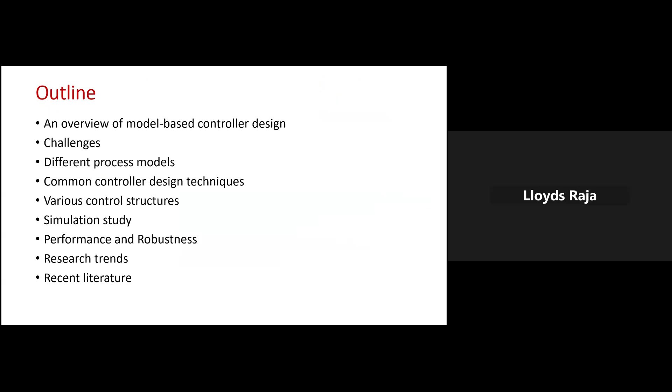The topic would be on model-based controller design, and we'll focus on some applications as well as the recent trends in this domain towards the end. I will keep the initial part of my lecture little lucid so that all of us can understand and correlate. In between, we'll also switch a little bit to the simulations, some very basic simulation exercises, so that you can connect with these topics in a better manner.

So first, we'll start with an overview. What this model-based controller design is all about. And we'll talk about some of the challenges in it. And we'll talk about various models.

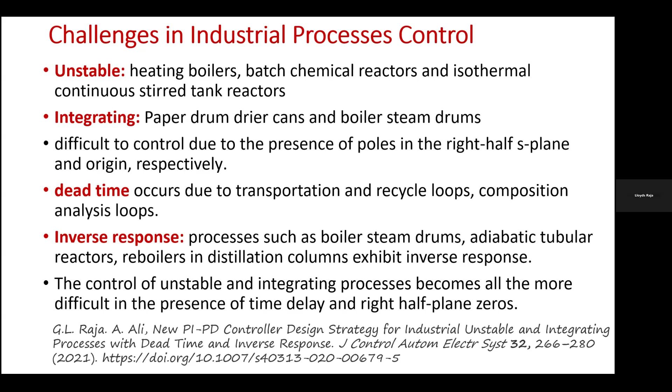Then there's inverse response. Some processes, when you analyze their behavior in open loop, respond in a completely opposite direction than expected, momentarily. You can see the response in the opposite direction for a while. This happens because the mathematical model of those systems has a right half plane zero. These types of processes are called non-minimum phase processes or inverse response processes, and they become even more challenging to control.

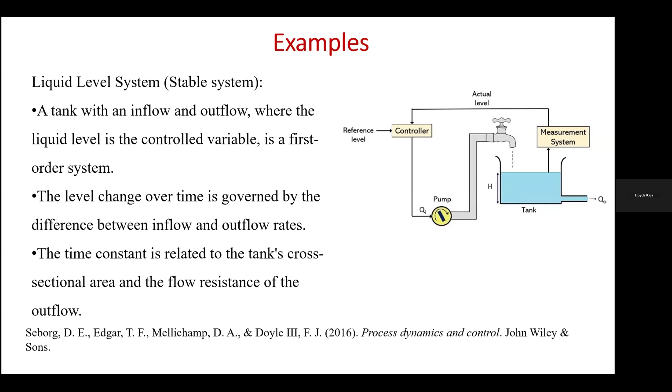These are some practical examples which you would even find in the textbooks. This is a simple liquid level control system which would behave as a stable process.

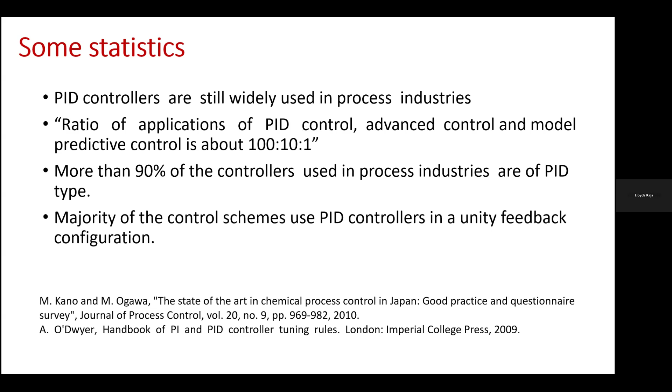And majority of them use a simple control loop rather than a multi-loop or cascade loop, unless that sort of complexity is required. They would try to solve their problem, or they want their control loops to be taken care of by normal PID as far as possible.

So to begin with, we will see some of the commonly used controller design techniques. These are all model-based controller design techniques. First of all, the direct synthesis method we will explore.

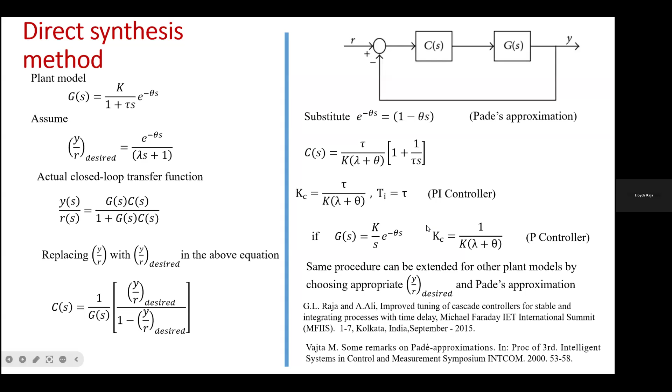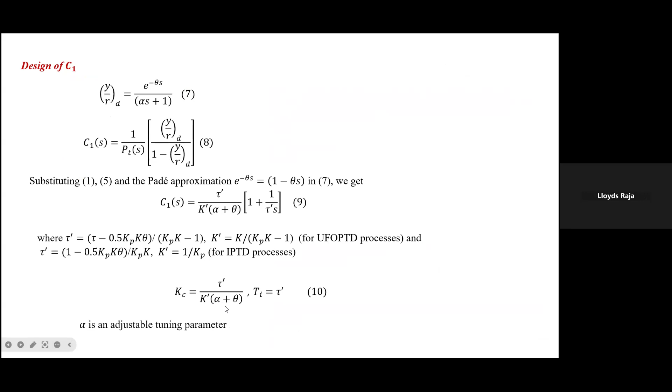When I do that, I get a PI controller which has a proportional gain, that is tau dash divided by k dash into alpha plus theta, and Ti is equal to tau dash. What you will notice once more is that this PI controller becomes a function of a particular tuning parameter, or the design parameter, you can call it.

If you go for a careful selection of this alpha, you'll be able to achieve a proper performance robustness trade-off, because all other parameters are known to you. You'll be able to get tau dash, k dash, theta, everything from the plant model, from where you actually started this design. So k will be known to you, tau will be known to you, and theta will be known to you.

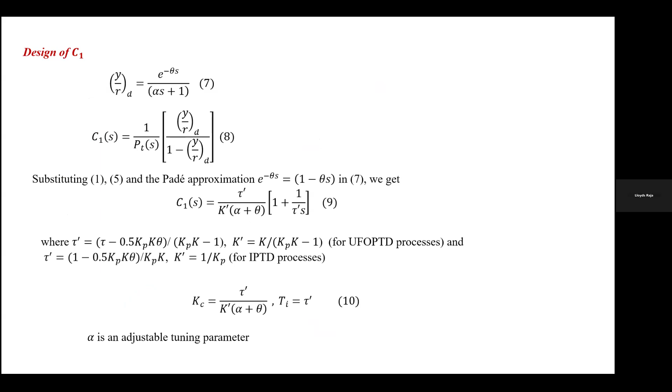The only unknown thing in this case will be your selection of alpha. If you can carefully select this alpha in equation number 10, you will be able to achieve a proper performance robustness trade-off. So let us start with a simple exercise.

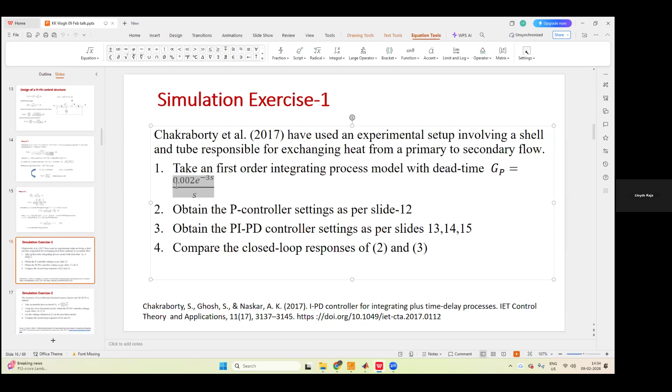This is a proper direct synthesis method. The second thing we are going to try in this exercise is how we can design a PI-PD controller for this particular plant transfer function. Here K will be 0.002, the time delay theta will be 3, and this is an integrating process. So this falls under the category K e to the power minus theta s by s, where K is 0.002 and theta is 3 seconds.

To make it easy for us, I have written a simple code based on these expressions, which were all presented before you. This is the plant transfer function. I am taking a lambda value, initially lambda equal to 3. Later on, I will talk about the performance robustness trade-off.

When I run this code, these are the settings I am getting: this is for the simple proportional controller, this is for the proportional derivative controller, and this is for the proportional integral controller. Let me open the simulating part where we are going to simulate this.

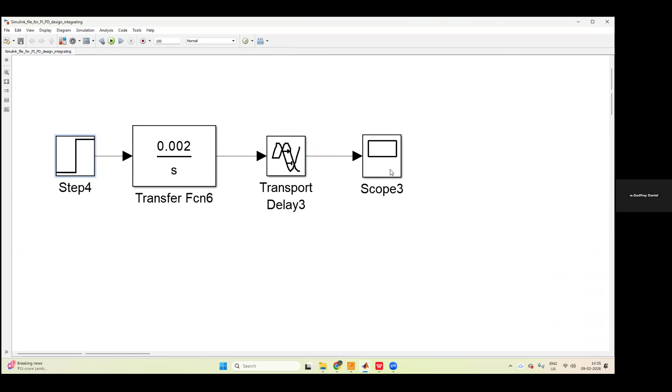We are going to simulate first the open loop system, to see how the system behaves in open loop. I have simulated the transport delay block for the delay of 3 seconds, and taken a step change at t equal to 0 seconds. With no controller and no closed loop, you are getting some sort of unbounded response.

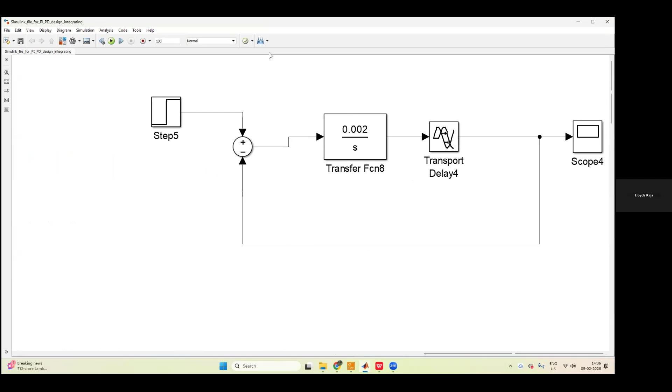Now I'm not going to use the controller yet. I'm just connecting this process in closed loop, with no controller as of now. So I have connected this in closed loop. Now you can see that it is still not stabilized, it is still giving an unstable response.

Now I'll go for the proportional controller. I have calculated the proportional controller gain as 83.33. You can also vary this and see the effect on performance. So I have given this proportional gain in the closed loop system, which is your plant transfer function, and I have also simulated some disturbance to show its effect.

This is the response you get for the closed loop system. Here, the drawback you notice is that using a single proportional controller, I am able to get a stable response, but the moment I apply the disturbance around 50 seconds, with the delay of around 3 seconds, you see the effect of the disturbance in the response after almost 53 seconds.

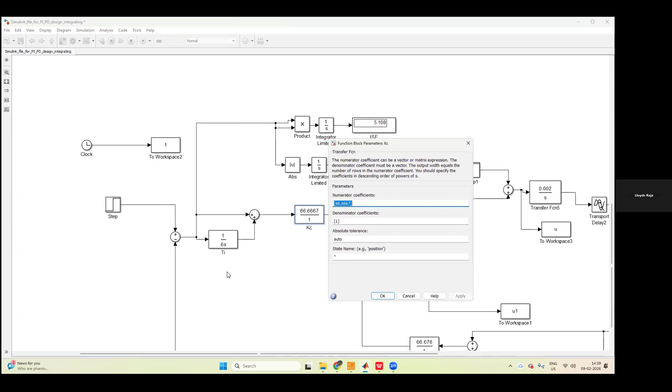So this is your plant transfer function, 0.002 seconds. And I have considered the same disturbance at 50 seconds with a final value of 5. And whatever the proportional gain, whatever the integral time constant that I have got through my calculations, and this is my proportional derivative controller.

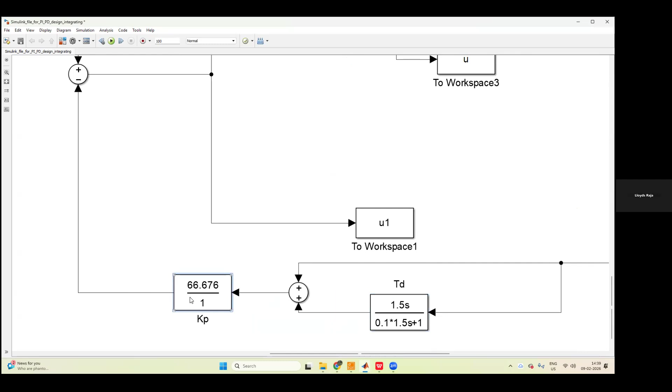When you implement the proportional derivative controller, you have to always do it in series with the filter. One thing is that it will make the Kp into 1 plus Td into S a proper transfer function. Secondly, it will also help you to handle the measurement noise. So the derivative term always comes in series with the filter. So here you have obtained your proportional gain as well as the derivative value, that is Td also.

So after this, I'm running the simulation. Now, exactly at 53 seconds, the effect of the disturbance is seen. But over a period of time, this disturbance is rejected and the response returns back to the desired value, that is 1. Now, if you see a comparison of what you have obtained in the simple proportional controller and the PI/PD control structure - what you see in the yellow plot is a simple proportional controller, and the pink plot is nothing but your PI/PD control structure. So in the first case, you got a steady state error, but by properly designing a PI/PD control structure, you are able to achieve disturbance rejection as well.

So this brings me to the second method of model-based controller design, which is internal model control structure. So again, we'll go through this internal model control structure theory first of all, and then we'll see some very basic simulations. So what is this internal model control structure?

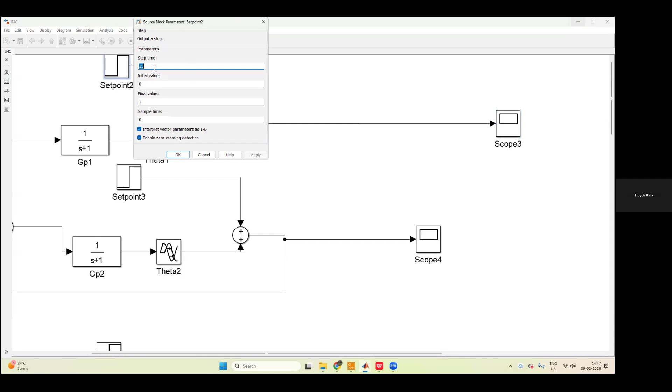Running the simulation, you can see that operating the open loop, you are having a disturbance here. I am giving a disturbance at 15 seconds, and this disturbance is not rejected.

So now in the closed loop, no controller involved, just operating the same plant transfer function in the closed loop. Here you can note that the response becomes more oscillatory, and the main problem is it has still not reached the desired value. You can see initially it is settling somewhere around 0.5, and then after you give disturbance, it again becomes oscillatory, and maybe if you had gone for a higher value of disturbance, it may not settle at 1.

Now in the third case, what I have done is applied this internal model control theory. This is the typical internal model control structure I have shown to you. Here I have taken the plant transfer function 1 divided by s plus 1, and the delay is 1.

What block diagram am I trying to simulate? I am trying to simulate the second block diagram, the internal model control structure. So for GM, I have used exactly this same plant transfer function, that is e to the power minus s by s plus 1.

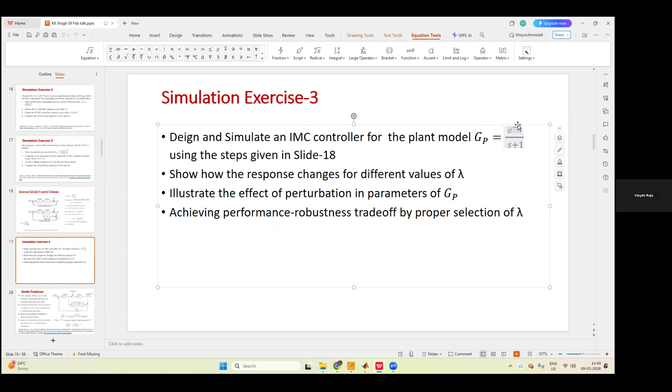In the case of the process, which is GP, I have slightly perturbed this plant transfer function. I have introduced some 20% variation here, so that this 1 becomes 1.2, and this theta becomes 1.2 as well. I have introduced this 20% change in the transfer function here in order to illustrate the robustness of this design and the role of selection of lambda. So I have 20%, and the delay also 20% perturbation I have considered.

Originally it was 1, I have made it 1.2, and the plant model I am keeping the same, because based on this plant model only we have designed this controller, and this particular study is being done in order to show the effect of lambda and its role in robustness.

Now, when you run the simulation, you can see that the plant is stabilized and it is reaching the desired value, that is 1. And this is the effect of the disturbance - after disturbance, due to the action of the controller, it is getting settled again at 1.

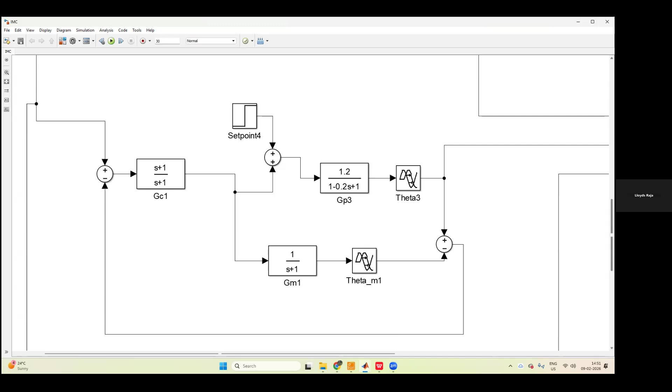Now in the second case, previously I have taken the value of lambda to be 2. In the second case, I have taken lambda equal to, let us say, 0.1, a very small value. And in the third case, I have taken lambda equal to 1, so this basically gets cancelled out. So you have taken lambda equal to 2, a high value, then lambda equal to 1, and lambda equal to 0.1.

In all three cases, I have taken the internal model to be 1 by s plus 1, e to the power minus theta s. And in the case of the plant, I have considered 20% perturbation. This basically simulates the variation between your plant model and the actual system dynamics.

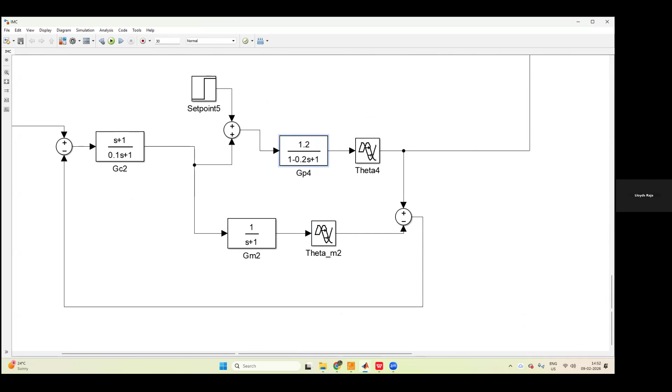Now we'll be able to see the effect of these three cases. You will see that in one case, you are getting a completely oscillatory response - that is corresponding to lambda equal to 0.1. So this is the response corresponding to lambda equal to 0.1.

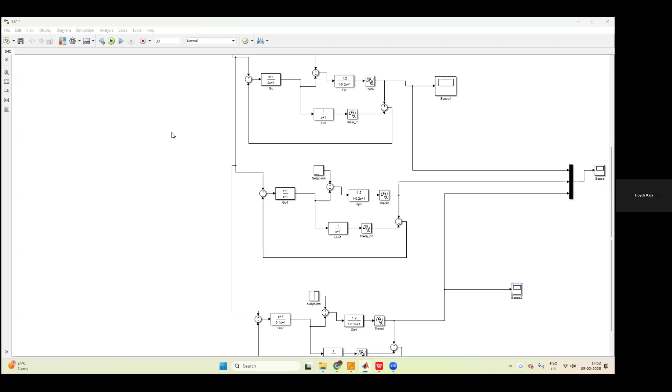The response is completely unstable here in the last case. So I selected a very small value of lambda, and this resulted in this unstable response. So when you go for a proper selection of this lambda, you'll be able to achieve good performance as well as satisfactory robustness.

This brings me to another model-based controller design method. We are going to talk about the Smith predictor. Why is this Smith predictor required, and what is its benefit? Another name for the Smith predictor is the delay compensator. How is it going to compensate the delay in the system? Let us see with a little bit of mathematics.

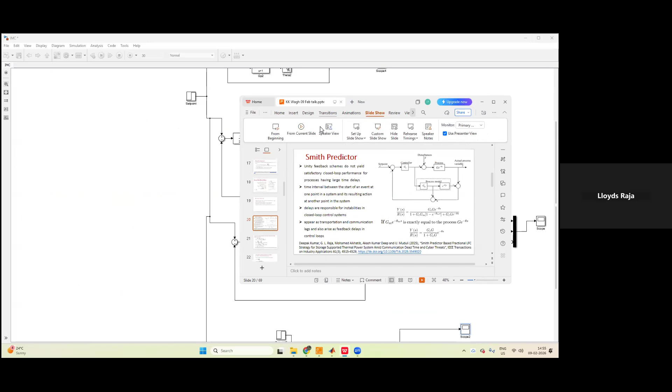Here you have a controller GC, which you have to design based on the process model. Before going into the design part, let us write the actual closed loop transfer function, y divided by r. When you write this transfer function for the block diagram, you get gc into g e to the power minus theta s, which is your process.

Then you have a process model, which basically has a delay-free part gm and a delay, e to the power minus theta m s. This theta m is the model of the delay in the actual system, and gm is the delay-free part of the process model. When you find y by r, this is the expression you get: gc into g e to the power minus theta s, divided by 1 plus gc into gm, times 1 minus e to the power minus theta m s, plus gc into g e to the power minus theta s.

Now, if you assume the plant and the model are perfectly matching - the g e to the power minus theta s term and the gm into e to the power minus theta m s term - then two of the terms in the denominator cancel out, resulting in a much simpler equation: y by r equal to gc into g, divided by 1 plus gc into g, into e to the power minus theta s.

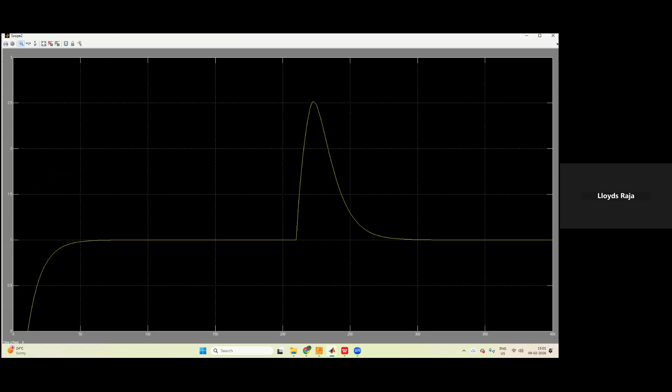So this design becomes very simple because the benefit I am getting by using this Smith predictor arrangement is that in this equation for y by r, there is no time delay term in the characteristic equation, which allows me to design this controller without considering the delay. This basically overcomes the sluggishness associated with the set point tracking, which was not the case without the Smith predictor.

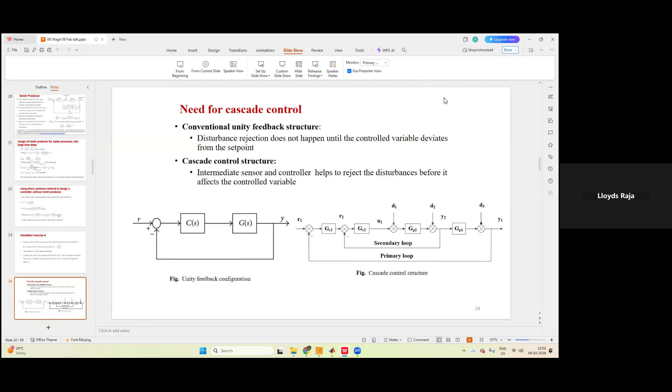Now this brings me to another alternative of this unity feedback control scheme called the cascade control structure. So I have shown a conventional unity feedback control structure as well as a cascade control structure. What is the difference between these two?

You will notice that there is an additional controller and an additional sensor involved. So this GP2 and GP1 put together will form a single system only. It is actually a single system which has an intermediate output Y2. So when you have an intermediate output Y2, you can implement a cascade control structure like this.

A typical example I can give is the DC-DC boost converter. If you see a boost converter, which is meant for boosting your input voltage, there will be two modes in which you can operate it. You can either operate it in a voltage control mode if you are going for a closed loop system, or you can go for a current control mode.

So in voltage control mode, you are going to just control the output voltage. In the case of current control mode, it basically becomes a cascade control implementation, where you are trying to control the output voltage of the boost converter by controlling your current, which is the inductor current. So that inductor current becomes your Y2 and your output voltage becomes your Y1.

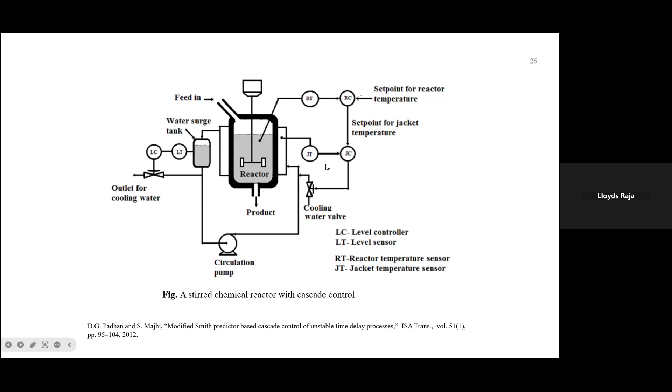So the intermediate output in this case, if I compare this setup with this block diagram, the jacket temperature becomes your Y2 and the reactor temperature becomes your Y1. The reference, which is the desired temperature of the reactor, becomes your R1. Any disturbances happening in the system are D1 and D2. So these are two examples which you generally see in the textbooks, and this is a common block diagram of a cascade control structure.

At this point, I would like to talk about the performance-robustness trade-off, which I have been illustrating through some simulation examples as well. If you go for a smaller value of time constant, you will get better performance, a better servo performance, set point tracking, and better disturbance rejection performance, but it will affect the robustness. However, if you increase the closed loop time constant, it will improve the robustness, but at the same time compromise the performance. So this becomes a trade-off between performance and robustness when it comes to the selection of the tuning parameter.

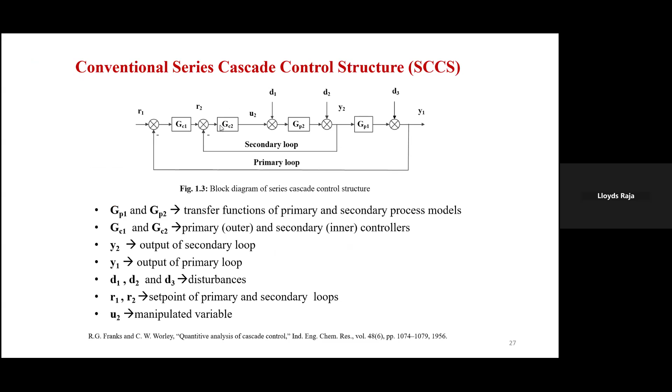So how to find the error? You can see this block diagram. R minus Y gives you the error, and all these performance indices are basically functions of that particular error.

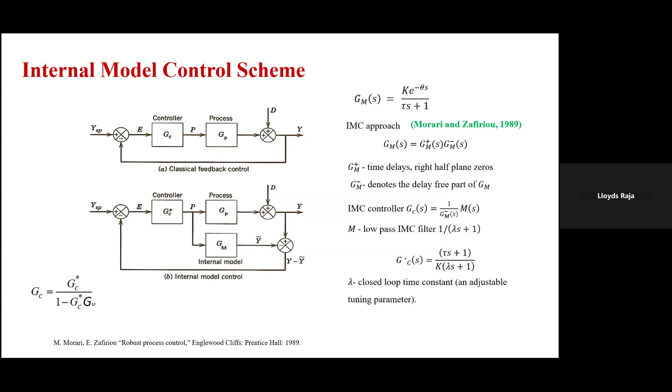Following this, I am going to illustrate a very simple procedure for how to design a cascade control structure using an internal model control structure. So basically, you have to go for this IMC theory. We have seen some examples also for this IMC theory. The same procedure you have to repeat two times for the cascade control structure. First, you start with the inner loop, complete the whole procedure, then somehow approximate the inner loop into a simplified form, and then go for the outer loop design. So in short, this internal model control procedure is repeated two times in order to perform this particular design. So I'll take up another design procedure, which is for the cascade control structure.

Using direct synthesis method, I have taken the inner loop plant model as K2 by 1 plus tau 2 into S, e to the power minus theta 2S. And in the outer loop, I can go for three different cases of stable as well as the integrating process.

We can see how a direct synthesis method can be used for this design. So when I go through this design procedure, you can basically get an idea how to use the direct synthesis method for designing a cascade control and how to use an internal model control method for a cascade control structure. So for both, the procedure is same.

Now what is the difference when we go for the outer loop? I'm going to approximate the entire inner loop with this desired closed loop transfer function, that is e to the power minus theta 2s by lambda 2s plus 1. Because when I started my design in the inner loop, this was the assumption based on which I proceeded with the design. So to simplify my procedure for the outer loop design, I have replaced the entire inner loop with this y2 by r2d, and this is how I have got this reduced block diagram.

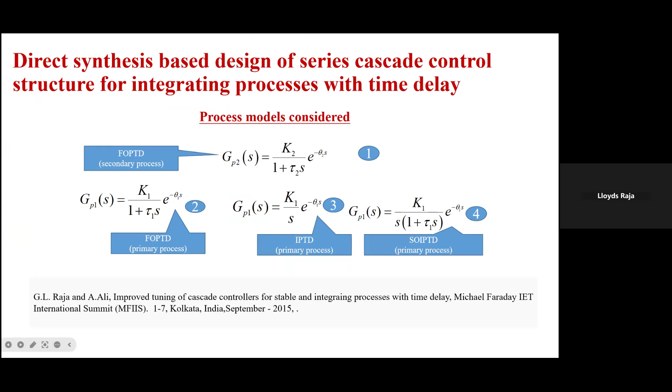And this is the procedure. I am basically extending the same direct synthesis procedure. I have taken a desired closed loop transfer function. This time I have taken a higher order because you can notice that we have now come to the outer loop. We have to consider the inner loop dynamics also and the plant transfer function of the outer loop also. So I have gone for a slightly higher order of the desired closed loop transfer function, and I have applied the direct synthesis procedure.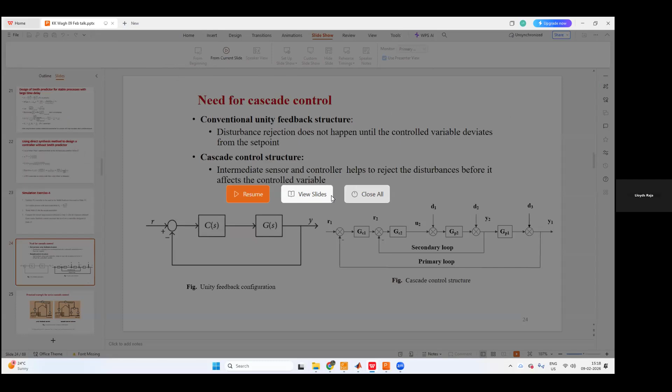Okay, I hope my MATLAB screen is visible. So what I have simulated here is the slide I am showing once again. What I have simulated is this particular block diagram. This is the block diagram which I have simulated.

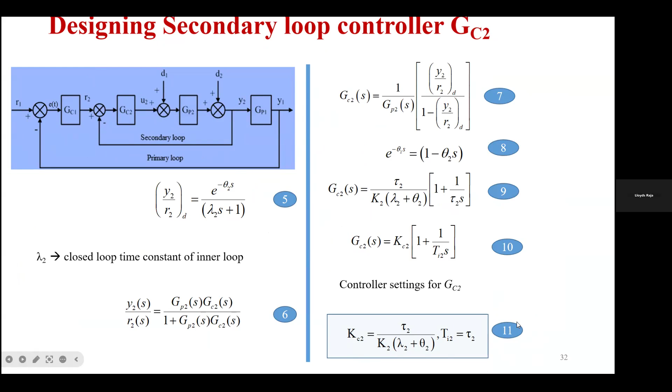The KC as well as the TI values, which represent the inner loop controller, are designed by this procedure as per equation number 11. And then equation number 19 will give you the outer loop controller GC1. Taking you back to the simulation.

You will notice that these two disturbances are basically occurring in the inner loop. And if I had gone for a single controller, you would not experience the same amount of disturbance rejection performance that you see here, because this intermediate sensor that you have here and the intermediate controller, that is the PI controller that you have designed here, will take care of these two disturbances in a better manner than a unity feedback scheme. So this is about the cascade control structure.

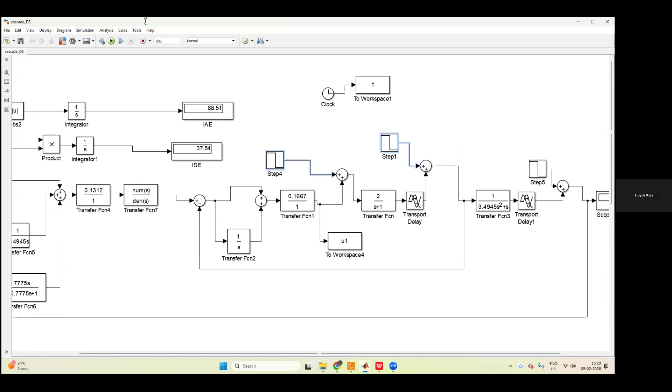In the remaining time, I would like to take you through some of the recent trends as well as some interesting applications that you can explore.

How will we design a controller? We have discussed the direct synthesis approach, the internal model control approach, and all of these are applicable for this plant model. Once you obtain the transfer function, you can apply any of these procedures and go for a careful selection of lambda in order to properly tune the controller, so that you don't have to go for hit and trial. Even today, if you want to go for a proper selection of lambda, you can go for minimization of any performance index, because it is just one parameter and you don't even require a complex optimization procedure. If you go for a simple minimization of integral of square error or integral of time weighted absolute error, you'll be able to get a proper selection of lambda.

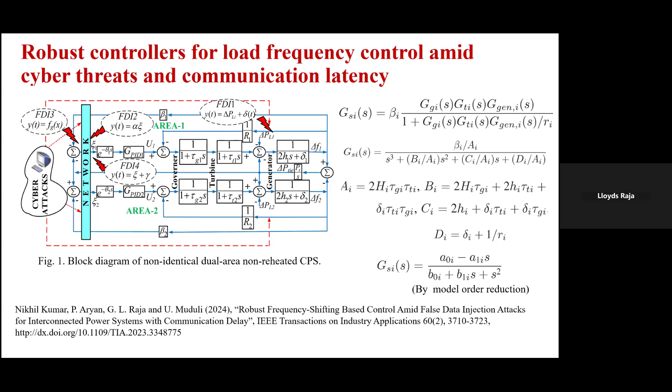And these are some of the literatures which I would suggest, which deal with the design of robust controllers for power systems, especially in modern day power systems.

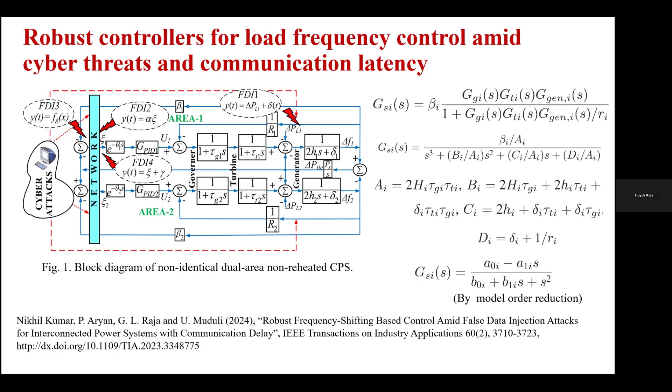Cyber attack is a very important issue. We never know what type of cyber attack is happening, so what is more practically feasible is to improve the robustness of your controller. Though you don't design it for any specific attack, after designing the controller, you can simulate various types of attacks, such as false data injection or denial of service, and check the robustness of your controller in all these cases.

These are some of the literatures I would like to suggest. Especially the first one actually uses a Smith predictor approach, which we just discussed. And the second literature I'm suggesting uses a triparametric fractional controller.

Nowadays, a lot of focus is being done on fractional order controllers because they are expected to have better robustness and performance than integer order controllers. But at the same time, the fractional order controllers coming up add to the number of parameters, which adds to the complexity of your design procedure.

So in this work, we have gone for a fractional order controller which has the same number of parameters as a PID controller, and we have seen how effectively it can deal with communication delay and cyber threats in modern power systems. Some more related works are suggested here.

If you are interested in biomedical applications, you can try this approach too. Recently, one of the PhD students in our group, also from Maharashtra, developed a biomedical suction device and implemented a pressure control loop in it.

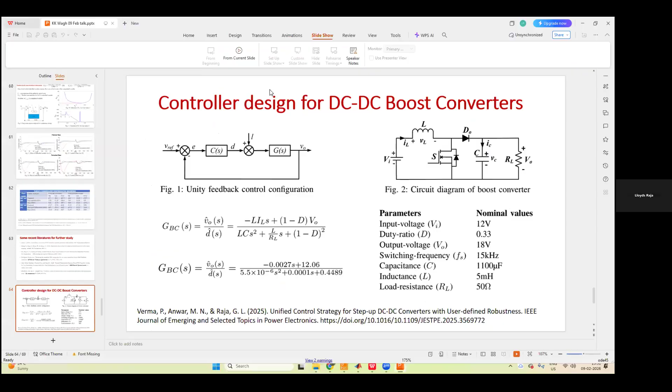And now let us have some discussion. I would like to take up some questions, if there are any.

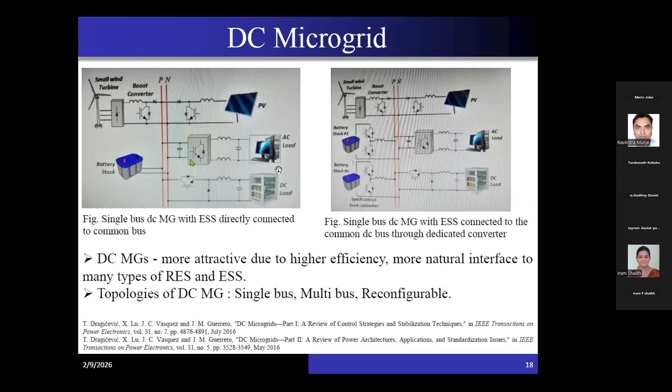However, they have a lot of applications. This is one application, the DC microgrid. In an energy storage system or by using fuel cell integration, even the fuel cell provides a DC output voltage and DC current, but it requires again a boost-type DC converter to step up its voltage. Even for solar PV application, a boost-type DC converter is required.

And again, with an energy storage system, there is a bidirectional DC converter - in one direction it operates as a boost operation, where the battery or the ultra capacitor is in the discharging condition. There is a DC bus connected across, be it solar panel PV as a source, or a fuel cell, or an energy storage system. This DC bus voltage is expected to have a constant output voltage irrespective of these variations. That's why we require these advanced control schemes.

In particular, I have employed the internal model control scheme. I will be explaining why I chose internal model control over other robust controllers, like sliding mode control, which is very popular but has its own limitations.

Even in electric vehicles, apart from DC microgrids, these boost-type DC converters are explicitly used as an interfacing converter with the energy storage systems. And even in portable devices, boost-type DC converters or even buck-type DC converters are explicitly used. We will be looking particularly at this power converter, the boost converter, and what are its issues. For more details on this portable device application, you can look at this particular transaction on power electronics.

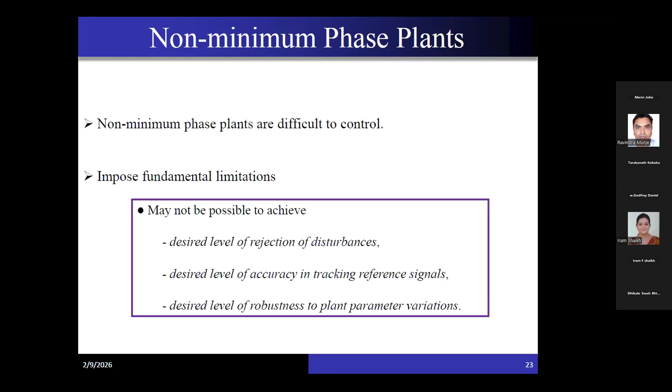But we can use internal model control scheme, and then we can go close to the non-minimum phase dynamics. So that's the best possible we can achieve. We'll see how to get close to these limitations.

There are two categories of non-minimum phase plants. Category 1 is a plant with a time delay, and category 2 is a plant with a zero on the right hand side of the S plane. These are the two fundamental categories of non-minimum phase plants.

If you see the plants with a time delay, P1 of S is a minimum phase plant, multiplied with a time delay operator e power minus s t. When we have such a plant, and if you give the input u of t at t equal to 0 seconds, you don't see the output till the time of capital T units. Only after the elapse of this T units, we'll start looking at the output. So this is the peculiar behavior which we classify as non-minimum phase behavior, and e power minus s t is the non-minimum phase component.

The other classification is if you have a zero particularly on the right hand side of the S plane, like a minus s. If you have such a zero, even though I am applying the input at t equal to 0 units in the positive direction, the plant responds initially in the negative direction and then comes back to the direction of the input. So this is another typical behavior of non-minimum phase plant.

So both this time delay and this RHP zero pose fundamental limitations in the control design. I will take an example of time delay, and we will see what are its fundamental limitations, and qualitatively the same is applicable for the RHP zero as well.

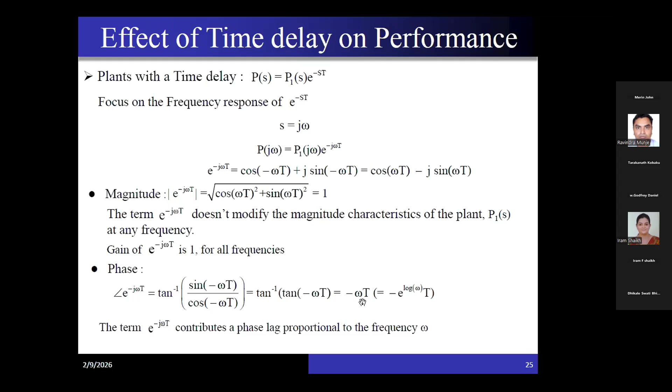Now let us look at the phase response. You see here it is minus omega t. So this term contributes a phase lag which is directly proportional to the frequency omega. Now let us look at the frequency plots. Magnitude wise there is no issue, but phase wise there is a lag coming in the form of minus omega t, coming from the phase response.

So the magnitude response has no issue, but this is the major issue: the phase lag is getting increased as you increase the frequency. This is the basic problem. As a result, the amount of phase margin that is available will be significantly low or negative. That's the issue that this minus omega t brings to the overall plant P of S.

Now let's try to understand this in more detail. To understand in a better way, I have constructed some examples.

Let us take a simple first order plant, 100 by s plus 10, where we can see the magnitude and phase response. These first order plants don't have any phase crossover at all. If there is no phase crossover, there is no question of instability, and you can use a simple proportional controller.

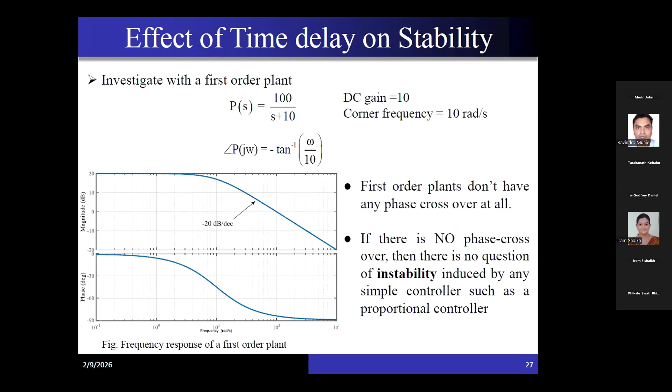Now let us try to bring some time delay for the same plant, 100 by s plus 10. I'm trying to bring a small time delay of 10 milliseconds. Let us see the phase issue here.

The basic idea typically one would use is to come up with a lead compensator that would improve the phase margin. When we add the lead compensator, we add a zero and a pole for its realization, and this zero will significantly help improve the phase margin. The idea is to add a zero slightly to the right side of the gain crossover frequency to attain sufficient phase lead.

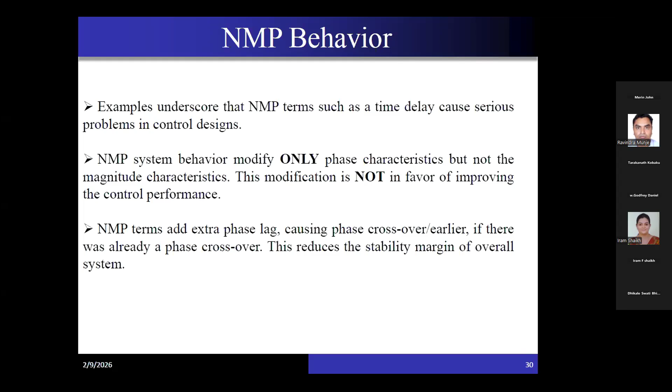So with this, we should have sufficient idea of the issues of non-minimum phase systems.

So the phase crossover frequency is much less than the gain crossover frequency. For these kinds of plants, if you want to design a controller, you have to pull the gain crossover frequency to be less than the phase crossover frequency. Only then will we be able to attain a positive gain and phase margin, so that we get stability.

So the moment I increase the time delay to 2 seconds, the phase decreases significantly, and as a result I have to reduce the gain crossover frequency or bandwidth to less than 2 radians per second. This means the amount of signal available for reference tracking or disturbance reduction is very much limited. That's the problem of these non-minimum phase plants.

For the same plant, 100 by s plus 10 e power minus 2s, to stabilize I have used the integral idea. By using this integral compensator, you see here the red color is the open loop plant, and the plant with the integral action is the blue. I have significantly reduced to less than 2 radians per second, so that the gain crossover frequency is in the process of stabilization. The gain crossover frequency has to be much less than the gain crossover frequency of the plant, so the kind of reference signals and disturbance signals that we want to track or reject are very much limited.

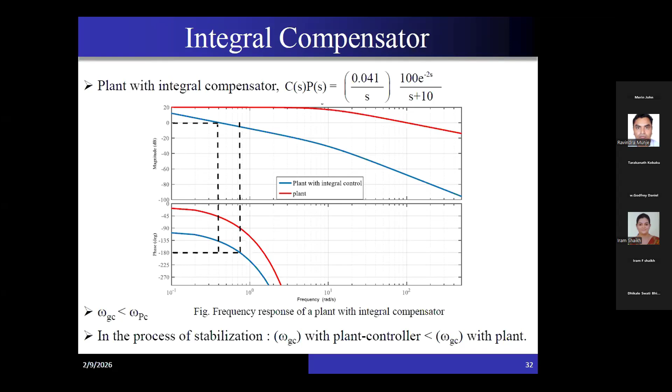So this is the takeaway point we need to understand clearly: for a non-minimum phase system that exhibits either time delay or a zero on the right hand side of the S plane, we can't get sufficient gain crossover frequency in the process of stabilization. Forget about improving the performance, first we need to stabilize this kind of plant in closed loop.

Now for the same plant, I have looked at the closed loop step response. Even though the open loop plant can settle around 100 milliseconds, a time delay of 2 seconds is making the plant take 25 seconds to settle. So it's a very sluggish response. This is what we can expect from non-minimum phase systems—they always exhibit sluggish response.

So these feedback controllers, which are typically employed to track reference signals and reject disturbances with frequencies greater than the WGC of the plant, can't be simple feedback controllers. We'll see how this internal model control framework will help us in giving stability as well as improving the transient performance, to overcome this sluggish response.

Again, qualitatively, I will not take much detail on RHP zero—it is qualitatively similar to time delay. If you look at the frequency response, the magnitude does not create any issue, but the phase is the culprit. It significantly reduces the phase margin, creating a phase lag, which significantly reduces the stability margins.

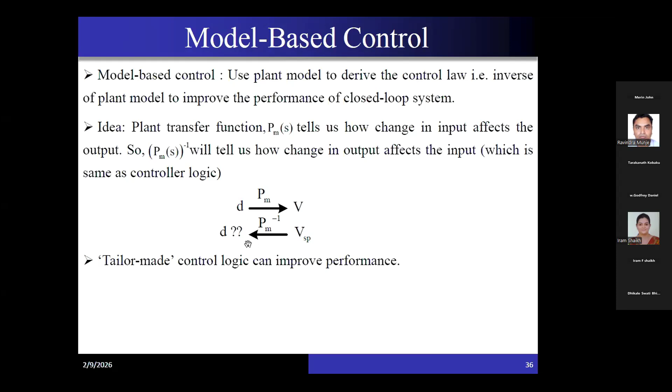This is the basic simple idea: if I'm giving control input D to achieve output V, using the plant model gain, can I use the inverse of this plant model gain to tailor the amount of input I should supply to achieve the desired set point? This is the idea used in model-based control or model-based predictive controllers, but these model-based controllers actually operate in open loop control configuration.

If you see here, this is a plant PM with input D, so it's D of S. If I use D and get V of S, and choose the controller to be the inverse of the plant model, I can achieve instantaneous control. It's very simple—I'm just inverting the plant model to achieve instantaneous control, meaning I'm able to track the set point instantaneously. But is it possible in practice? How to use this model-based control—is it possible to get instantaneous control?

But you see here, it's not possible to achieve this instantaneous control. There are a few limitations, so let us look at them. To get instantaneous control, we should have a perfect model, meaning the inverse should exactly cancel the actual plant. But constructing a perfect model is actually not possible in practice.

As a result, a plant-model mismatch will arise. There is a difference between the actual plant and the model we come up with. This plant-model mismatch does not allow us to reach the desired set point. So the basic idea is to take the feedback of the plant-model mismatch, instead of the typical feedback configuration which takes only the output measurement as feedback.

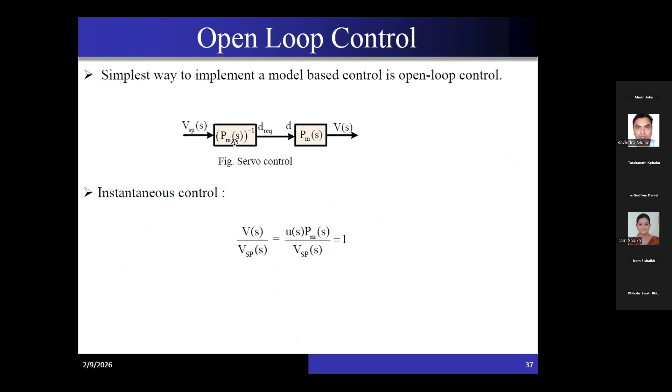The first issue is we will not be able to get the perfect model. The second issue is the inversion—plant inversion is not always possible, particularly when dealing with non-minimum phase plants.

So this idea also will not work, because if you see, to compute the control input at the present instant, I need the measurement at the future instant, the output at the future instant, and the derivative of the output at the future instant. Practically, this is not possible. So this idea of inversion for non-minimum phase plants has to be done carefully.

Now the third issue is that the invertible plant may not be a proper transfer function. If you have such transfer functions and use the inverse of the plant model, it's practically not possible, because we know we should have more poles than zeros for physical realizability. So this is also an issue.

How to overcome this is by cascading a filter. We'll just see how to do this idea.

Now again, the issue with open loop control is that it doesn't have the ability to reject disturbances. But the advantage of open loop control is instantaneous control—the output will track very instantaneously, but there are these limitations. So how to overcome these limitations is through the internal model control framework. We will see how this IMC is different from the feedback configuration.

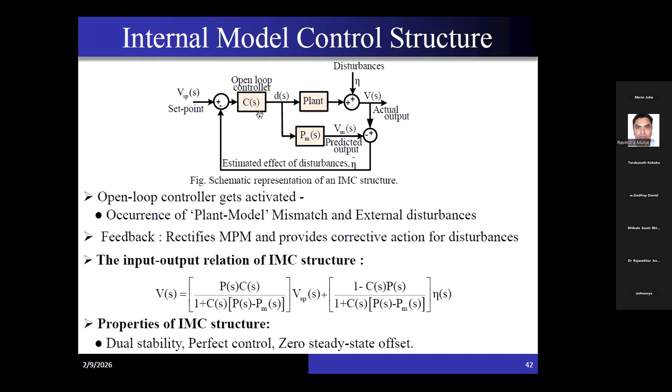So these are the 3 properties of this IMC structure. Now, if you see, this is what I have said.

If you see the way the closed loop control schemes are shaped by using the sensitivity function and the complementary sensitivity function, this is for the fundamental basic feedback control structure, PC by 1 plus PC. We expect the complementary sensitivity function to be equal to 1 over a range of frequency, and in the same range of frequency we expect the sensitivity function to be much less than 1, so that we can get disturbance reduction and robustness.

But here, in conventional feedback control architecture, there is no straightforward relationship between the controller tuning and the sensitivity function, and similarly for the complementary sensitivity function. So this is the basic problem in the feedback control architecture. We cannot shape both S and T simultaneously, whereas in IMC we can shape them simultaneously and independently.

And how this set point filter will help us: here we are going to add a set point filter. So the basic advantage or necessity of the set point filter is that it deals with the plant model mismatch and unmeasured disturbances, and the tuning is very straightforward to attain the robustness and good disturbance reduction. These are the two advantages of having the set point filter. So you can have an explicit handle over the speed of this set point tracking response and for this disturbance reduction.

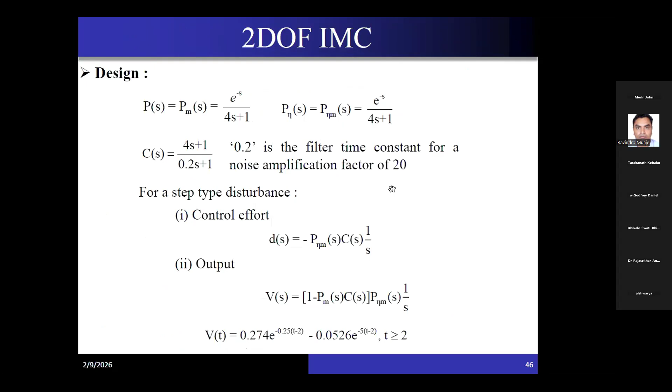Now let us consider that. I will not go into the detail of 2 degrees of freedom. Consider that there is a 2 degrees of freedom IMC. Now I'm trying to compare 1 degree of freedom IMC versus a 2 degrees of freedom IMC.

So what we need to understand is that there is a trade-off. If you want to recover back to the nominal operating point quickly, you need to apply more input, and it is still possible to get significant improvement in performance through 2 degrees of freedom IMC. So let us see what a 2 degrees of freedom IMC is, and in what way it is different from 1 degree of freedom IMC.

So using these two filters, if I can tune them, I can achieve effective disturbance rejection using F-eta, and effective set point tracking using FR(s). So this is the meaning of 2 degrees of freedom IMC - we have two explicit filters. As usual, it does not change the properties of the IMC. That is, if the open loop plant is stable and the controller is stable, then the closed loop stability is guaranteed.

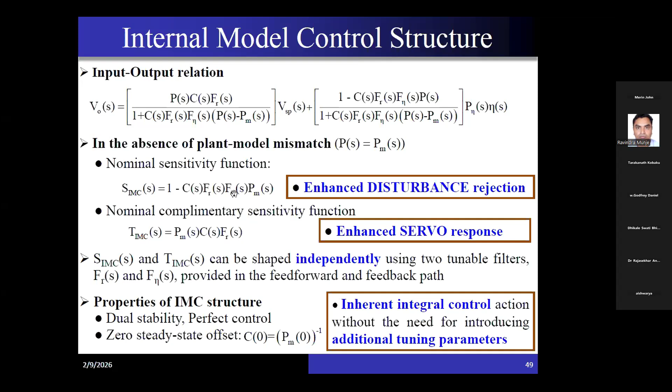So we can get effective disturbance rejection, we can get an effective improvement in the servo response, and we don't require an additional tuning parameter for the integral action. Moreover, the tuning of FR and F eta is very straightforward, unlike in the feedback control architecture.

Now there are three simple design steps, particularly when dealing with non-minimum phase plants, like time delay or a zero on the right hand side of the S plane. The meaning of design includes designing the controller, designing the set point filter, and designing the disturbance filter. These are the three design components that we need to do.

Before going to the design, whenever we encounter a non-minimum phase plant, the first step is to decouple the minimum phase part and the non-minimum phase part. The plus stands for the non-minimum phase component, and the minus stands for the minimum phase component. So the first step is to factorize, or decouple, this minimum phase component and non-minimum phase component. Once we do this, we can design the controller.

The controller, as usual, is designed the way we use in model-based control: choose the invertible portion of the plant model. We try to choose the invertible portion because if you choose the non-invertible portion, the controller becomes unrealizable, and that's why we avoid it. Choosing the non-minimum phase component makes the control unrealizable, so we choose only the portion which is invertible, that is PM minus.

Moreover, we have seen that inverting the plant model gives an improper transfer function. So to make it realizable, we cascade it with the filter FR(s), which is nothing but a set point filter. Here we have two tunings: how to choose the value of n, and how to choose the value of lambda r. The value of n is chosen such that C of s into FR of s is realizable, and lambda r of s is a tunable filter time constant, which is nothing but a closed loop time constant. We will see how to choose lambda r by taking a simple practical example.

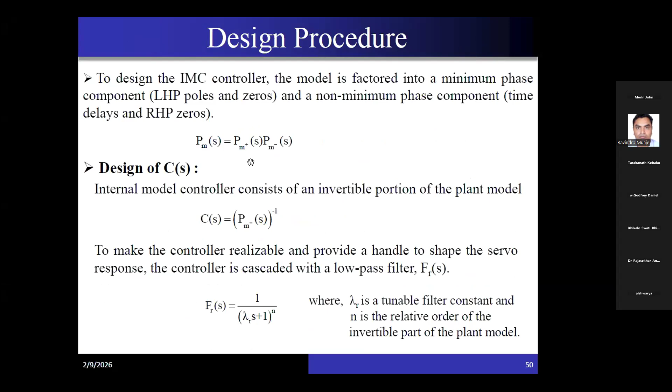Here we need to find the values of alpha 1 and so on, and m decides the number of poles in the disturbance transfer function f p eta of s, and lambda d is the filter time constant, similar to lambda r. However, lambda d decides the regulatory behavior and lambda r decides the servo behavior, in the sense the tracking behavior, while lambda d decides the disturbance reduction behavior.

So how to get the values of alpha 1, alpha 2 and so on, and lambda r and lambda d? We need to have these values, and this can be attained by solving this equation: one minus this, which is basically nothing but the sensitivity function. We are trying to solve this sensitivity function for all the poles of the disturbance transfer function p eta of s. So this is the basic idea here in the design of f eta.

Now if you see these non-minimum phase power electronic converters, I am taking the basic power electronic converter, which is a simple boost converter. However, there are many other high-gain converters which come under the class of non-minimum phase power electronic converters. These converters are used in day-to-day life, renewable energy, and mobile applications, electric vehicles or fuel cell electric vehicles, hybrid electric vehicles. This boost converter is a conventional high-gain converter where the gain is limited to 3.

I mean, the 3 in the sense, if the input voltage is let's say 10 volts, you can get a maximum output voltage of 30 volts. That's the meaning of gain equal to 3. There are many high-gain converters, but all of them typically come under the class of non-minimum phase systems. Let's see why this is called a non-minimum phase system.

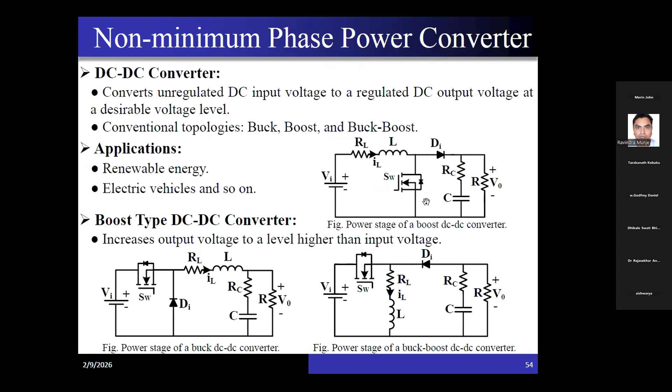Let us try to understand in a simple manner. You see here, this is a MOSFET switch, given through a gate drive pulse which is on and off. So whenever it is on and whenever it is off, we basically get two linear circuits. This is a linear circuit when the MOSFET switch is in on condition, and this is a linear circuit when the MOSFET switch is in off condition.

You see here, whenever this switch is in on condition, the inductor is going to charge. However, this output voltage, this capacitor, is getting discharged through the output resistor to the load. So the inductor is charging in this fashion, while in the same duration, the output voltage is discharging because the load is expecting the output voltage.

However, there is no connection between the input and output sides. The energy from the input side is not being transferred to the load side in the same cycle, so we need to wait basically till we come to the off cycle. So in the on cycle, the inductor charges, and in the off cycle, whatever energy is stored, the inductor discharges with a negative slope, and then the capacitor builds its energy.

That's how this is actually a two-stage process. That's the reason why this comes under non-minimum phase dynamics. In the same switching cycle, this inductor is charging, and the inductor is discharging in another cycle. Now that is one issue that comes under non-minimum phase dynamics.

And the second issue is, if you see here, in these high-gain converters, as you increase the duty ratio, which is nothing but the plant input, after a certain point you see it is increasing its gain. That's why I have said that it is a high-gain converter.

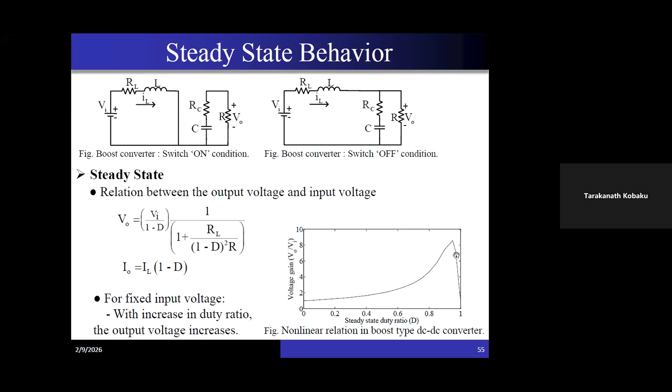Beyond 0.9, it is no more a boost or high gain converter because the gain is getting reduced. For a practical model, it was somewhere around 0.7. So that's the meaning of practical challenge - the duty ratio is always constrained. And in addition to that constraint, it is actually reduced compared to what we see in the theory.

The theoretical derivation shows the gain is being limited by the inductor ESR. You see here, this is the reason why the gain V0 by Vi is getting limited by this factor.

In addition, when we are trying to deal with practical systems, we are expected to use a reduced number of sensors to improve the overall reliability of a closed loop system. So with this regulatory control, servo control, and keeping in mind that the duty ratio is practically constrained, and that we are expected to use a minimum number of sensors to improve reliability, we'll go ahead with the control design.

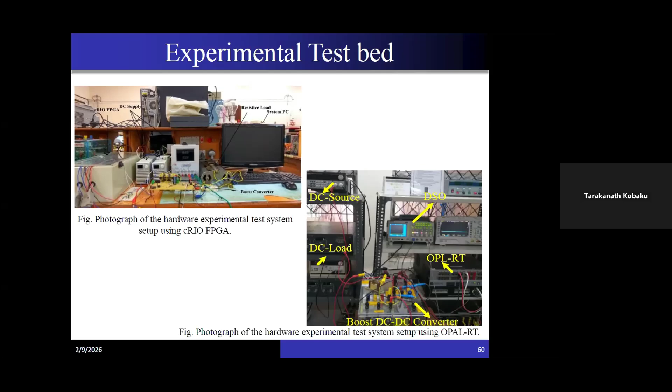I have used both the Compact RIO FPGA platform and the Opal RT platform to get the experimental results. You see here this boost DC converter when we design it in continuous conduction mode.

There are two conduction modes of these converters: one is continuous conduction mode, the other is discontinuous conduction mode. This RHP zero comes across in the continuous conduction mode. Moreover, these converters are expected to operate in continuous conduction mode because the efficiency is higher, and the current ripple and voltage ripple are much smaller compared to the discontinuous conduction mode.

We can see here the transfer function has an RHP zero, and there are two disturbance models: one is the input voltage variation, the other is the output current variation. We will see how we can use this disturbance model as well in the design of the internal model controller.

But typically, let us look at the conventional control schemes that are employed for these converters, basically current mode control. This is the structure of the current mode control. This current mode control employs two controllers: one outer loop and one inner loop. The outer loop is the voltage controller and the inner loop is the current loop controller.

However, this inner loop current control requires the sensing of the inductor current. In addition to sensing this inductor current, this current mode control scheme exhibits inherent instability, irrespective of any converter. This is how I have represented a DC-DC converter. Irrespective of any DC-DC converter, this current mode control, typically employed, in particular the peak current mode control, goes into instability for a duty ratio greater than 0.5.

That means whenever the plant input goes greater than 0.5, it goes unstable. And it requires sufficient slope compensation techniques to stabilize, which are again not transparent. Moreover, using this additional current sensor is actually sensitive to noise.

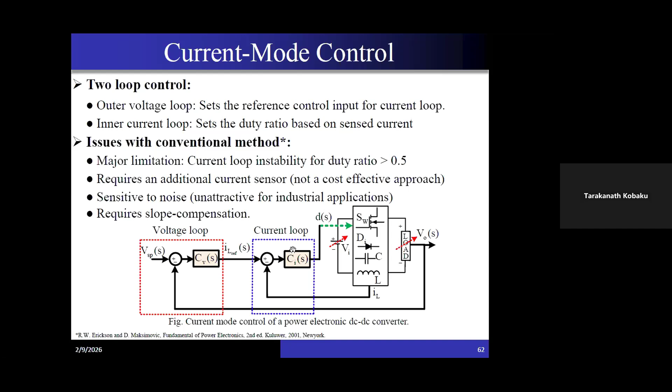As a result, on the other hand, there is a voltage mode control, which is a single loop control. You see here, this is a single loop control, but while it has advantages, it also has some limitations.

The advantages are it does not have a limit on the duty ratio, unlike the current mode control, where the duty ratio is restricted to 0.5. Here there is no such duty ratio limit, and there is no requirement of an additional current sensor for measuring the inductor current because it is a single loop control. So it is a better solution.

Whenever you have a plant with an RHP zero, the single loop control exhibits a sluggish dynamic response. Even with the lead compensator and the integral controller, the plant gives a very slow response. So this single loop controller for RHP zero gives a sluggish response.

So to improve its performance, typically it uses feed forward control, as shown here. But our objective is to reduce the number of sensors, so we do not want to use feed forward control. With the use of single loop control, what we call voltage mode control, is it possible to improve performance without using feed forward control?

It is still possible using the internal model control structure, and still possible using PID control, but we need to employ the right kind of tuning techniques. So in this talk, I will use the IMC.

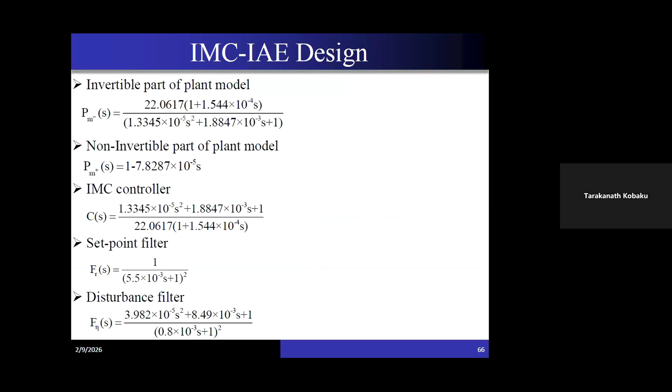So that's how we came up with the research contributions employing IMC, and we found there are even limitations with IMC, and how to overcome these limitations in the form of an additional degree of freedom called the anti-reset wind-up compensator. IMC can be designed for minimizing integral absolute error or integral square error, giving the resulting controllers, plant set point filters, and disturbance filters.

There are different ways of designing a PID controller. The conventional PID controller does not take into account the RHP zero. That's why its response is very sluggish.

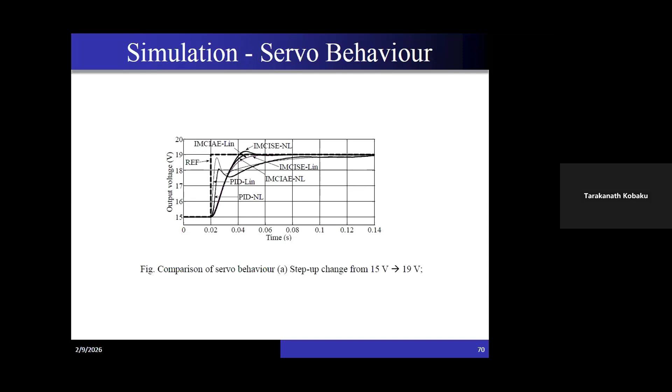Similarly for the step down case, one can look at these performance indices in the paper. Now, the observation is that even though we have done IMC control for both IAE factorization and ISE factorization, IAE factorization is having an upper hand in all case studies, like disturbance reduction or set point tracking, compared to PID as well.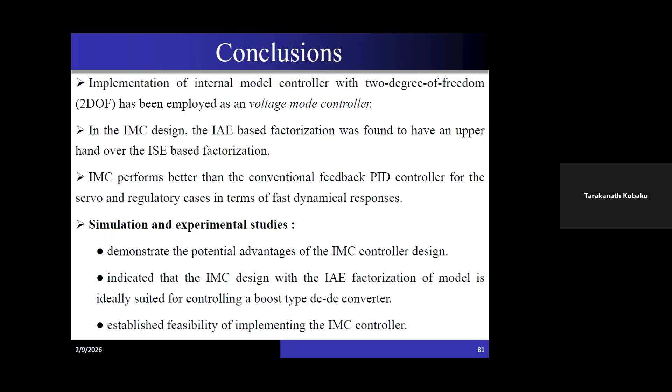So let us look at what is the meaning of input saturation. This input saturation, or duty ratio saturation, occurs whenever we encounter large set point changes or large disturbances. I have taken a case study of large set point changes.

And what is the meaning of this anti-reset windup compensator, and what is its role in input saturation? We will see now. The problem statement is the same, but we have looked at a second objective, and we have contributed a conference paper by developing the anti-reset windup compensation technique.

So this is the problem statement, and I'm not changing it. This is how we use IMC, deployed for the boost converter by integrating the anti-reset windup compensator, but again without using additional sensors—using only the sensed output voltage as feedback.

Now, whenever there are sudden disturbances or sudden large set point changes, this input gets saturated—that is, D of S lies outside the limits of this saturation. Under that case, the IMC controller C is unable to see the actual effect of D on the output.

So the controller does not know the effect of saturation on the output, and as a result, the output voltage takes a long time, and it exhibits overshoots, undershoots, and sometimes it may even go unstable.

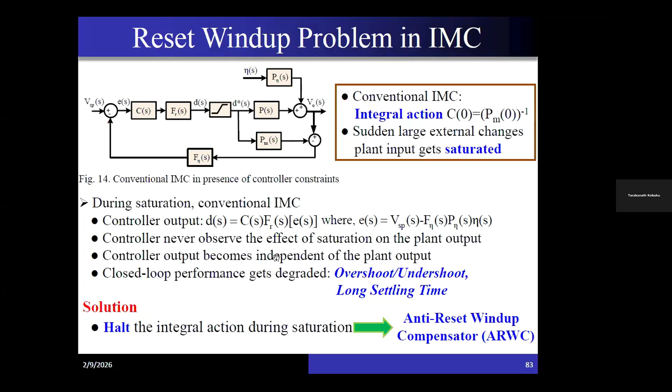We have come up with a systematic design procedure for the anti-reset windup compensator, and we have not sacrificed performance during normal operation. We have not disturbed the earlier designed controller, FR and F eta of S, and redesign of IMC is not required.

They have given the issues with existing anti-reset windup compensation—a couple of techniques they have addressed, showing the trade-off between performance and stability, where one has to sacrifice one of them. However, in this proposed work, we don't need to sacrifice either performance or stability, nor do we need to redesign the controllers. In addition, we have developed systematic tuning guidelines.

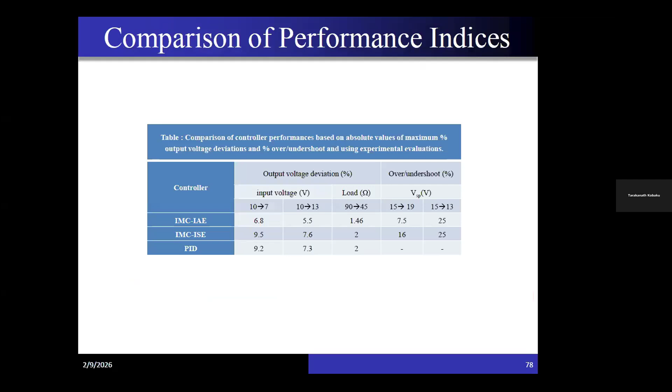Now we have tried values of K equal to 100 and K equal to 200. Where do these values come from? From the plant itself - that's why we call it a systematic guideline. The plant has a steady state gain of 22. Using this, we have chosen the value of K around 5 to 10 times this gain.

So we have chosen k equal to 200. Now for tau also we have chosen tau equal to 0 milliseconds, tau equal to 10 milliseconds, and tau equal to 20 milliseconds. Now among tau equal to 20 milliseconds and tau equal to 10 milliseconds, tau equal to 10 milliseconds is going to help us improve the closed loop response compared to tau equal to 20 milliseconds. Why? Because again we need to look at the sensitivity function of the inner loop.

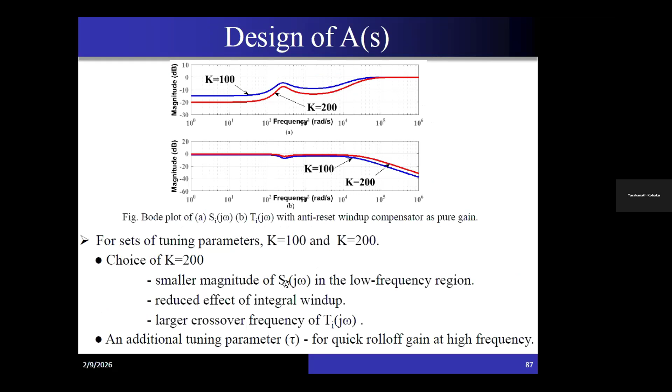So both stability and performance are achieved, which was not available in the literature. This was the first work under the IMC framework. So we have done implementation using the FPGA. This idea we have done in simulation as well as in experiments. So I will go to the experiments. I have taken a case study.

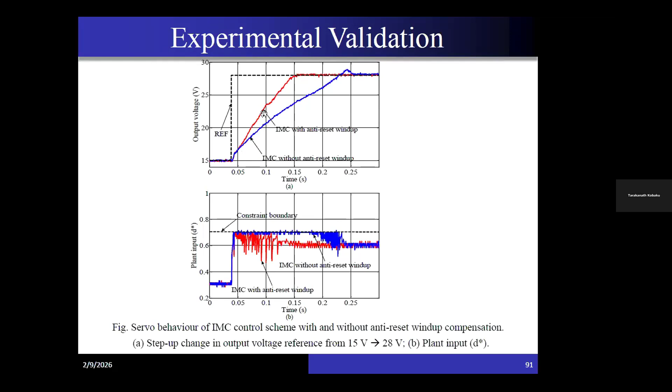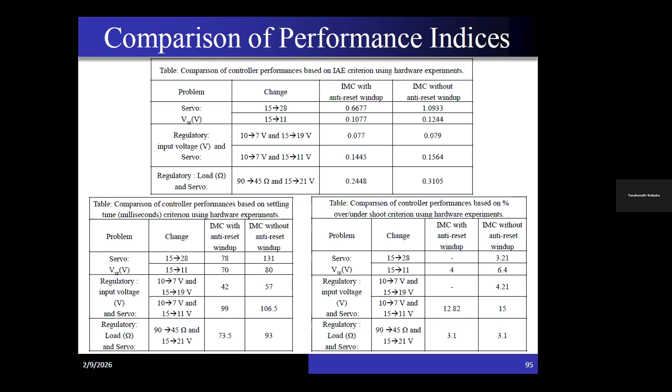With the proposed anti-reset wind-up mechanism, these case studies show this proposed work is giving promising results in terms of reducing the settling time and reducing the overshoots. So we have done this performance analysis using performance indices such as IAE error and settling time.

So what we have achieved is that with the anti-reset wind-up mechanism for large set point changes, the input is desaturated quickly with the proposed technique compared to without the anti-reset wind-up mechanism. With this proposed mechanism, we are able to achieve significant improvements in the transient response, that is, reduction in overshoot and reduction in settling time. And we achieve this by making the plant input come out of saturation quickly.

Let me conclude what we have achieved using this internal model control from the beginning. This IMC structure is able to provide the transparent tuning framework for the set point filter FR and for the disturbance filter F eta. In particular, it helps us deal with non-minimum phase plants, allowing us to operate close to the non-minimum phase dynamics. That's the advantage of this IMC structure, which is not available with other feedback structures.

We started with a simple transfer function around an operating point, and we verified its robustness under plant model mismatch in nonlinear simulation and experiments. We were able to see significant improvement in performance compared to conventional PID and ISE factorization. So IMC controller with IAE factorization is ideally suited for non-minimum phase plants. That is the conclusion.

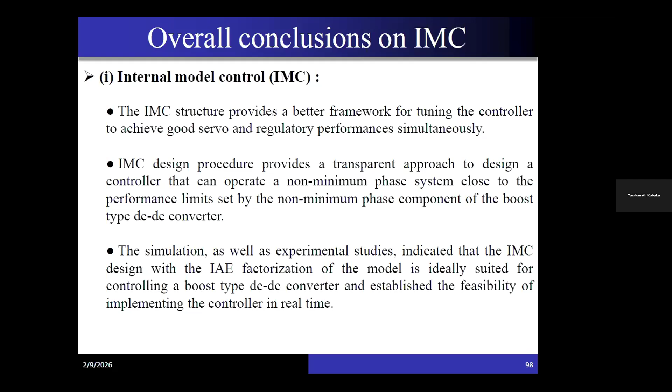So let me stop here, and I would like to take a few questions.

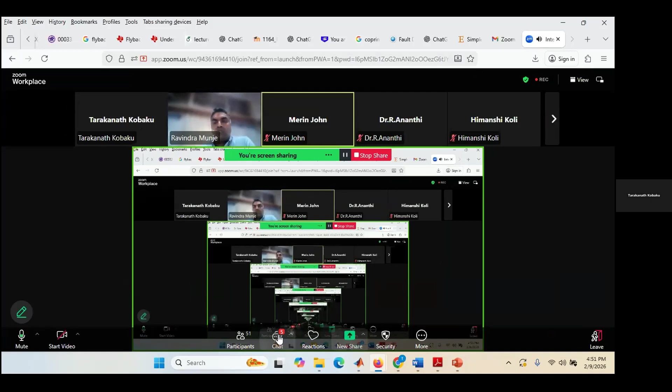What are the challenges that you face while going for the real-time implementation of these controllers?

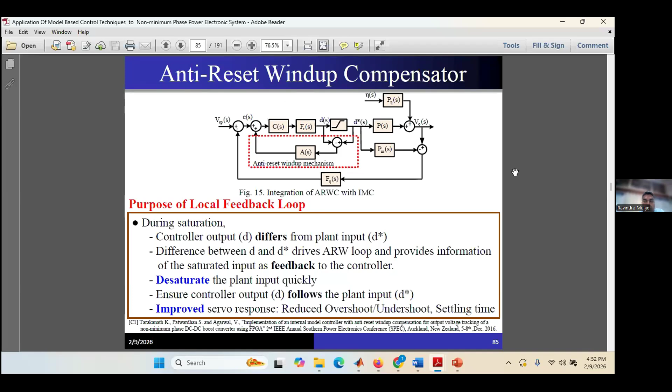Having the real-time experimentation is very difficult. Actually, it faced a lot of hurdles.